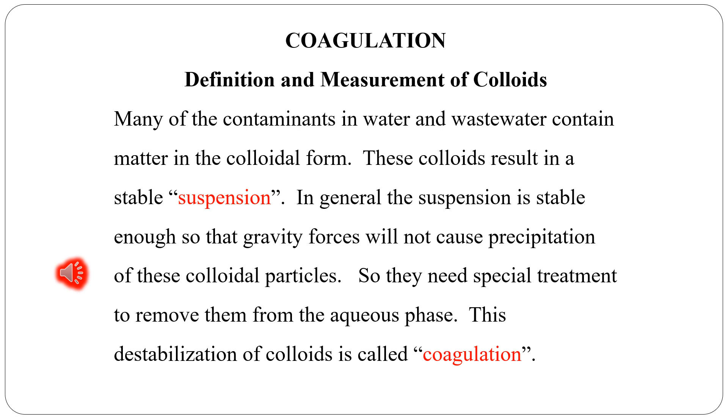So, the process of mixing certain chemicals to water to neutralize the electrical charge and to form insoluble gelatinous flocculant precipitate for adsorbing and entraining suspended and colloidal particles of impurities is called coagulation.

That's why for effective settling, aggregation of these small particles into large and more readily settleable solids is necessary. And this is done by using some chemicals which are called coagulants.

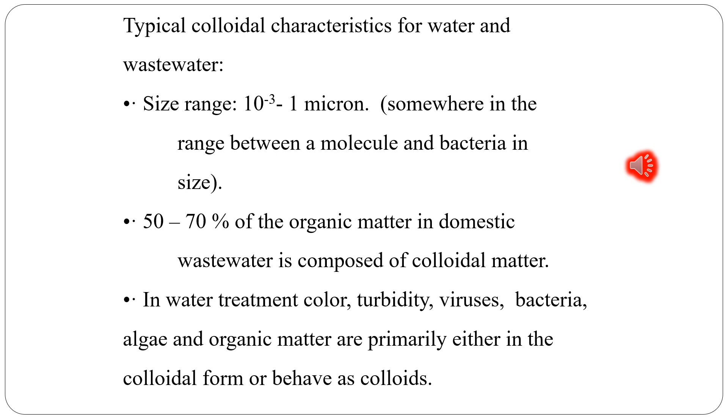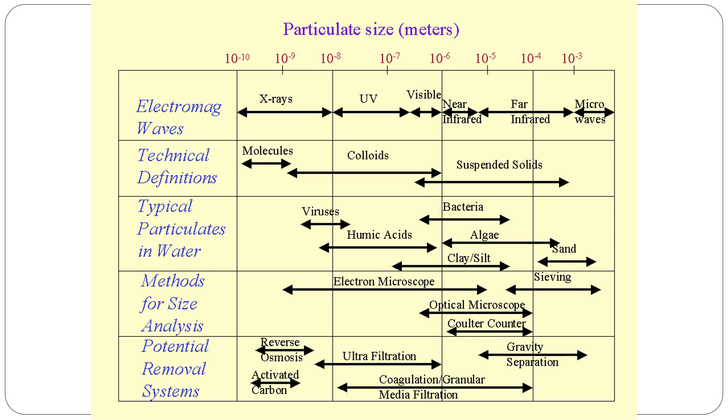So as discussed, particles which are just big enough to have a surface which is microscopically observable or which is capable of adsorption of another phase, that is the size which is nearly about 0.001 micron to 1 micron, and having surface area 1 square yard to 1 acre per gram.

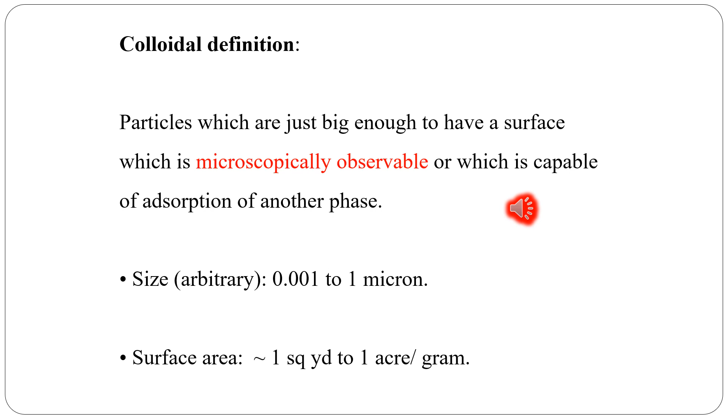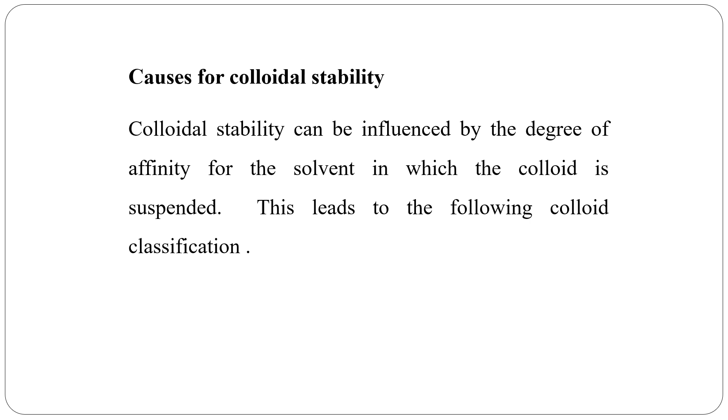So now we have to discuss regarding diffuse electrical double layer theory. It states that the stability of colloidal particle depends upon the electric charge that they carry or possess. The primary charge of colloidal particles may be due to charged groups within the particle surface or due to adsorption of a layer of ions from the surrounding medium.

These primary charges are counterbalanced by ions of opposite charge in the water phase. Electrical double layer is a formation of interface between water and solid, which you can see in the next figure. Double layer consists of charged colloidal particle. Second, an equivalent excess of oppositely charged counter ions which accumulate in the water near the particle surface.

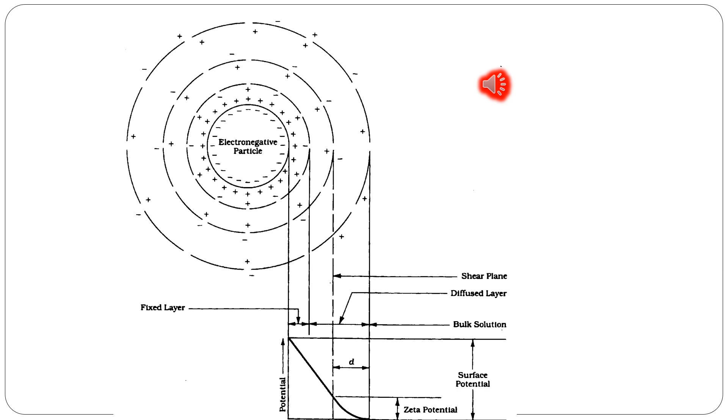So students, you should understand that an electric double layer consists of three parts. First, surface charge, second, Stern layer, and third, diffuse layer. So surface charge means its own charge, that is the colloidal particle having its own negative charge, which is adsorbed to the particle.

And Stern layer, that means in the coagulation process, when we are adding coagulant, which has attraction of opposite charge particles, that is counter ions, which are attracted to the Stern layer. Counter ions attract to the particle surface and are closely attached to it by the electrostatic force.

And diffuse layer, that means a combination of both negative and positive, that means counter ion molecules in it. This diffuse layer contains free ions with high concentration of counter ions. So the ions of the diffuse layer are affected by electrostatic force of charged particles. You should remember all this.

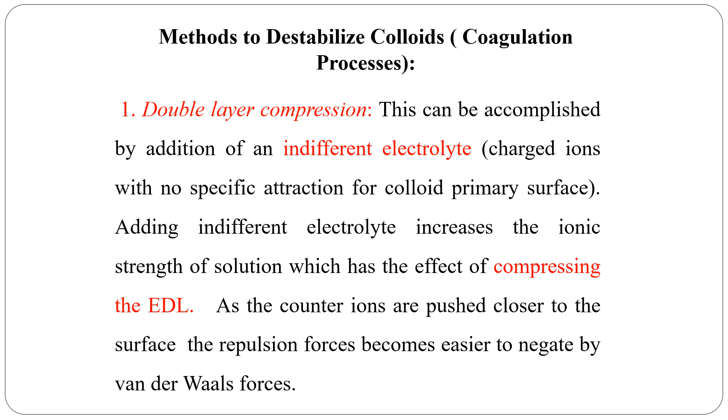We should know various factors affecting the coagulation process. So first is the type of coagulant. That means when we are adding coagulant into the water for the coagulation process, there are various types of coagulant like ferric salts and alum salts, or different coagulants like polyelectrolytes and natural coagulant also. So the coagulant type is the first important factor.

Second, dose of coagulant. That means whatever coagulant we are adding, its concentration and quantity is a key factor for the coagulation process. Then characteristics of water, like the kind and quantity of suspended matter present in the water. Next, temperature and pH. Then, whatever turbulence and method of mixing is carried out, and for how much time we are adding coagulant, that is also very important in the coagulation process.

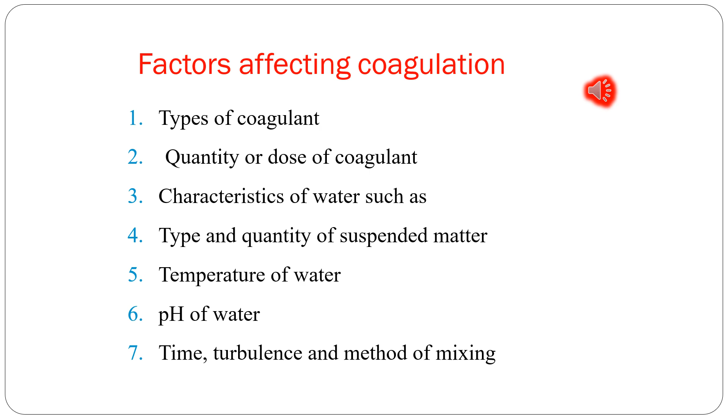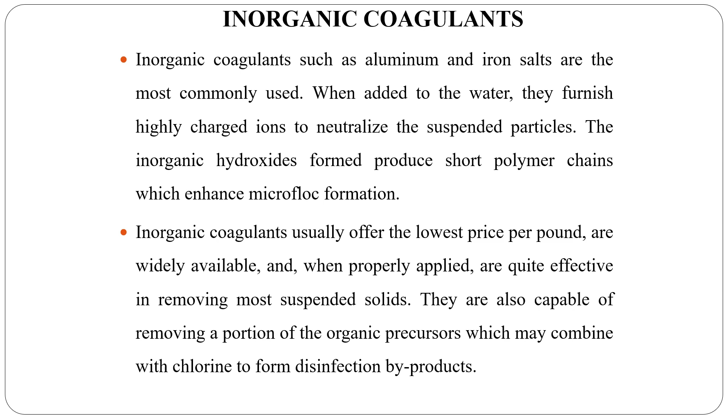We should know the different common coagulants used in the coagulation process. Those are alum, ferric sulfate, ferric chloride, ferrous sulfate, and sodium aluminate, as well as chlorinated copperas, magnesium carbonate, ferrous sulfate and lime, magnesium carbonate and lime, sodium aluminate, as well as polyelectrolytes.

So in this PPT, we can see the common coagulant; most commonly alum is used. When alum is added into the water, what chemical reaction takes place is very important to understand. In this, we can see the first four coagulants lower the alkalinity and pH of the solution, while sodium aluminate will add alkalinity, which increases pH.

So when alum is added into the water, it will react with the bicarbonate alkalinity present in water. As we know, bicarbonate alkalinity is of two types, calcium bicarbonate and magnesium bicarbonate. So when alum is added into the water, it will react with calcium bicarbonate present in water and form calcium sulfate, and floc formation will take place in the form of aluminum hydroxide. And during this process, 6 molecules of carbon dioxide will be released.

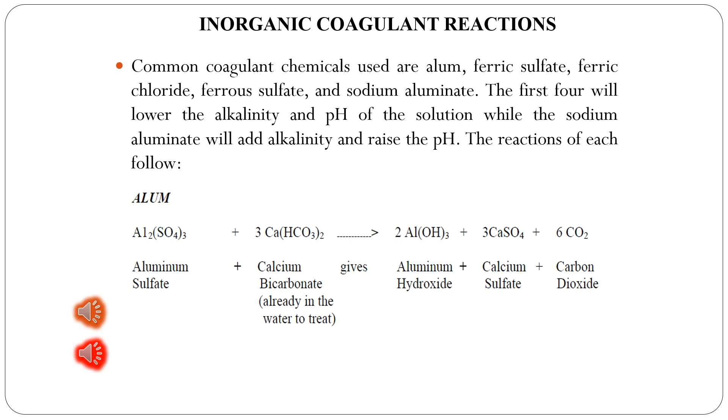So the coagulation process is carried out in 4 steps. First, feeding, that means addition of coagulant in either dry or wet form. Then mixing: whatever coagulant you have added, either powder or liquid, is to be mixed in a proper way. That is carried out in various ways like a compressed air device, centrifugal pump, mixing channel with vertical baffle plates or sometimes horizontal plates, then mixing channel with mechanical means. The third step is flocculation and the fourth is clarification.

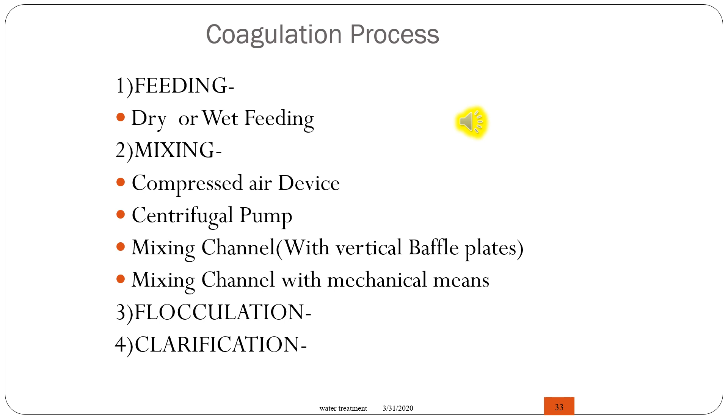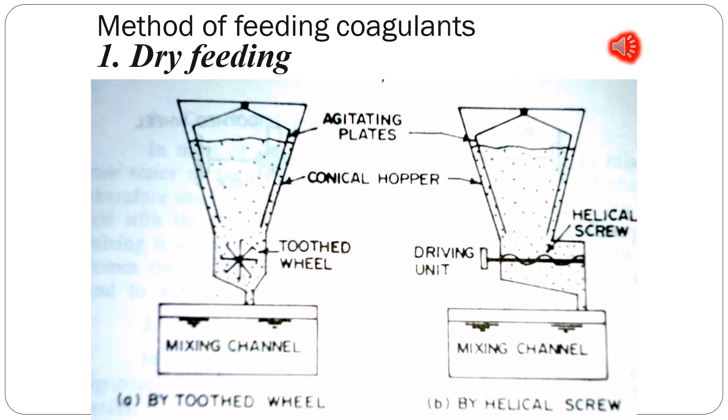Actually, dry feeding is carried out in two ways: first, by using a toothed wheel, or second, by a helical screw. Each unit consists of conical hopper tanks in which coagulant in powdered form is placed and allowed to fall into mixing basins, with agitating plates provided inside the tank to prevent arching of the powdered chemical. The dose of coagulant is regulated by the speed of the toothed wheel or helical screw mechanism. The mechanism in turn is connected to Venturi devices in the raw water pipe or mixing device.

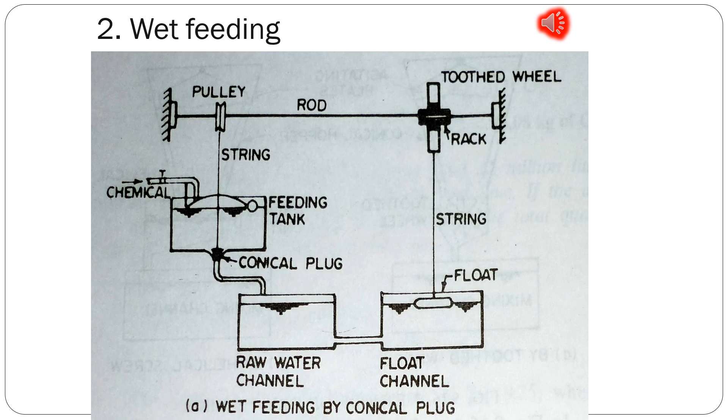Second is wet feeding. In wet feeding, a solution of the coagulant of required strength is made and stored in a tank. As shown in the figure, it is carried out by a pulley and conical plug arrangement. The conical plug arrangement is provided to control the addition of coagulant in proportion to water flow. As per the flow, the conical plug is pulled by this pulley, and due to the float arrangement on the rod, only that much coagulant is added into the raw water channel. This is carried out in wet feeding.

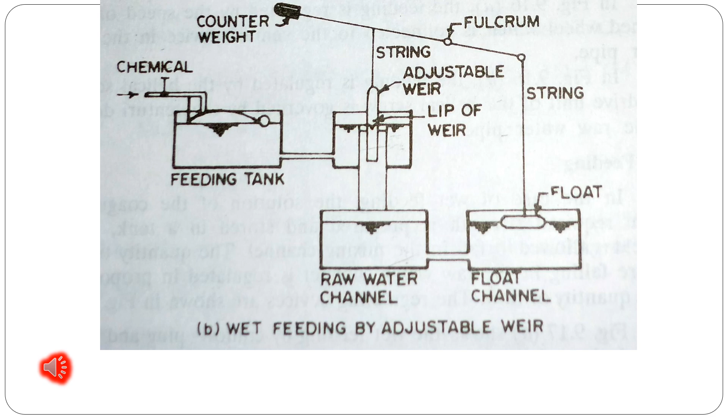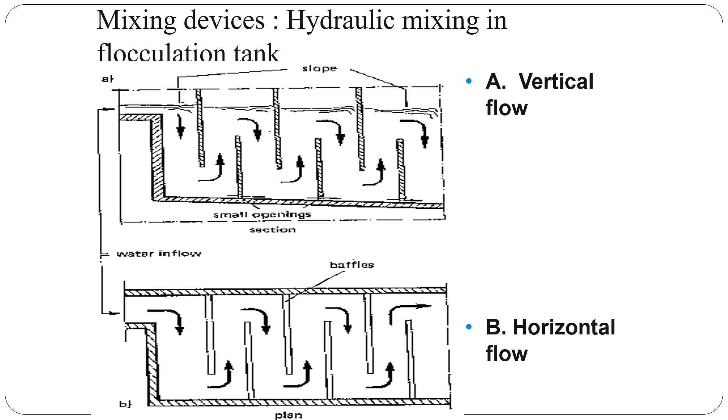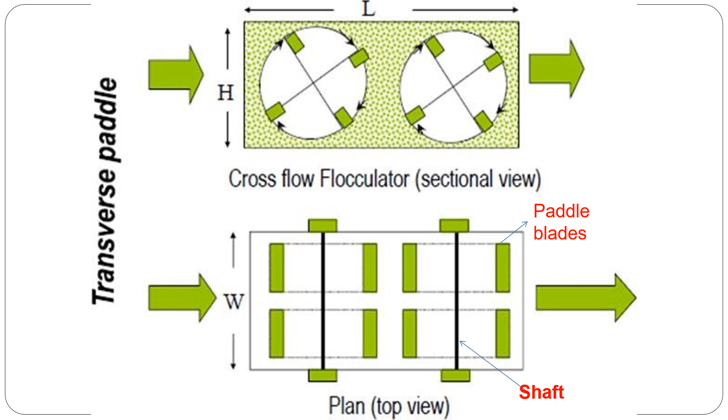So students, we have to understand the concept of mean velocity gradient. It is already discussed that flocculation is controlled motion of water assisting formation of the floc. The rate of flocculation depends upon factors like turbidity, type of coagulant and its dose, and most important, mean velocity gradient. Mean velocity gradient is defined as the rate of change of velocity per unit distance normal to the section, that is meter per second per meter. Hence its unit is per second.